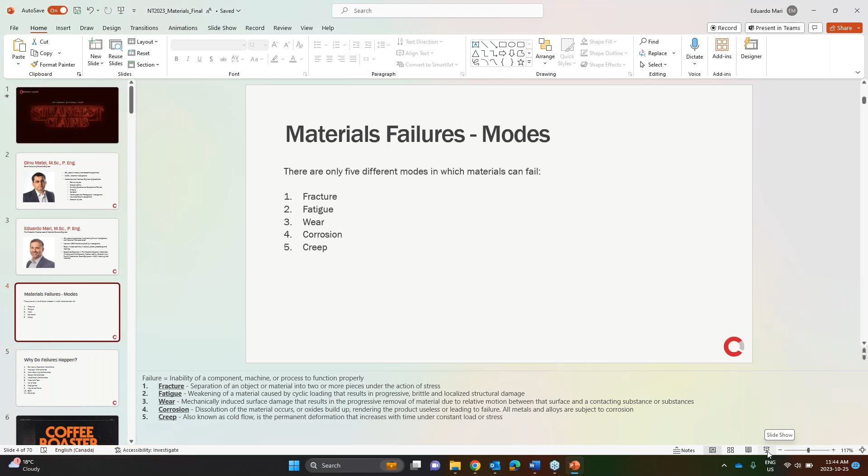Okay, thank you everyone for joining. I'm gonna show my screen here. Just give me a second. There we go. Can you see my screen, George and Mark? Yeah, looks good. Okay, fantastic. Again, thank you everyone for joining.

I'm going to be chatting with you today about some material failure cases, some very strange material failure cases. Just to begin, the failure modes in materials can be classified into 5 different ones: fracture, fatigue, wear, corrosion, and creep. Each one has particular characteristics and a way they present themselves to the trained eye or examination techniques.

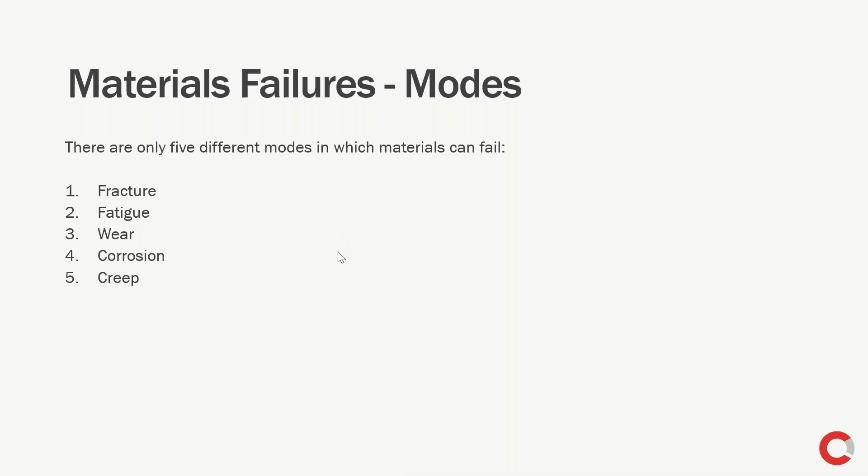Sorry Dino, do you want to start with your first case study? I think Eduardo covered this already. Yeah, I think he ran through these for you.

Among the interesting and unusual cases I've encountered, I want to share a few with you. The first involves a fire in a coffee roaster. A coffee roaster doesn't look very special from the outside, but it's important for coffee makers because this is where the coffee is roasted, dark or medium, depending on the temperature the beans are heated to. The green coffee beans are put into the machine and heated to a certain temperature to reach the desired properties.

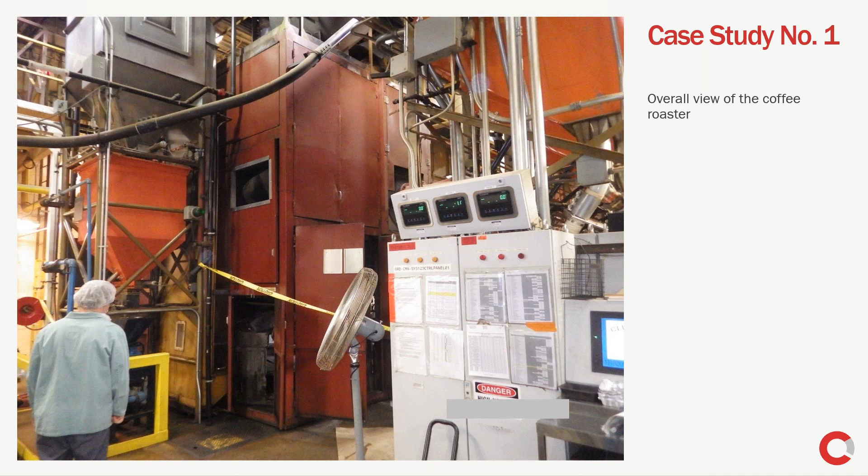This coffee roaster was about 20 or 30 years old, and they had encountered problems in the past with some of the rivets. Inside the roaster, it's like a tower, and at the base there are steel plates which are perforated to allow air through to adjust the temperature. These plates are secured to a frame using rivets, and over time the rivets deteriorated, causing the plates to lift, jam, and the motor shaft broke. The coffee self-ignited.

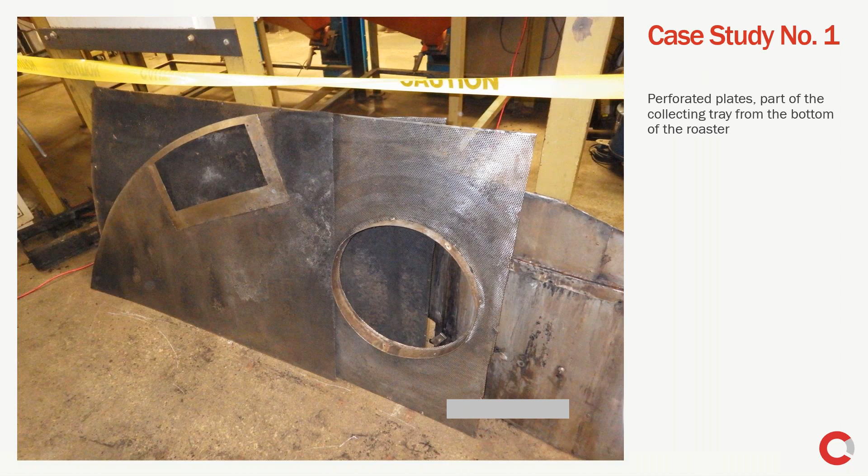I did not know until I was involved in this investigation that coffee is actually very hard. It was the coffee beans that degraded the rivets, allowing the steel plates to lift and jam. This is a section of the rotor for the roaster, and you can see it was heavily deformed. It shows heat discoloration and some post-fracture damage, showing that it continued to rotate after the fire started.

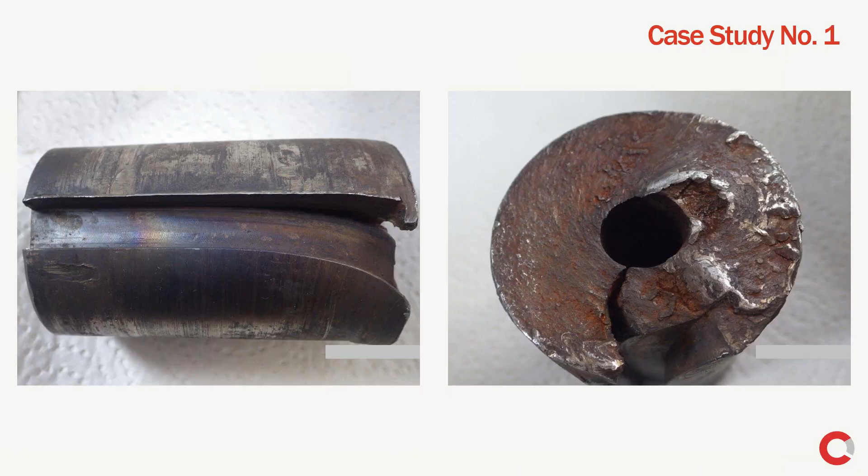The next case is also very interesting, and sad, because one person was left with a damaged hand. It involves a pulley machine from a gym. The pulley machine is designed with carriages that can go up and down along the columns, allowing you to adjust them to the desired position. Each column has holes where a safety pin can engage, keeping the carriage in place.

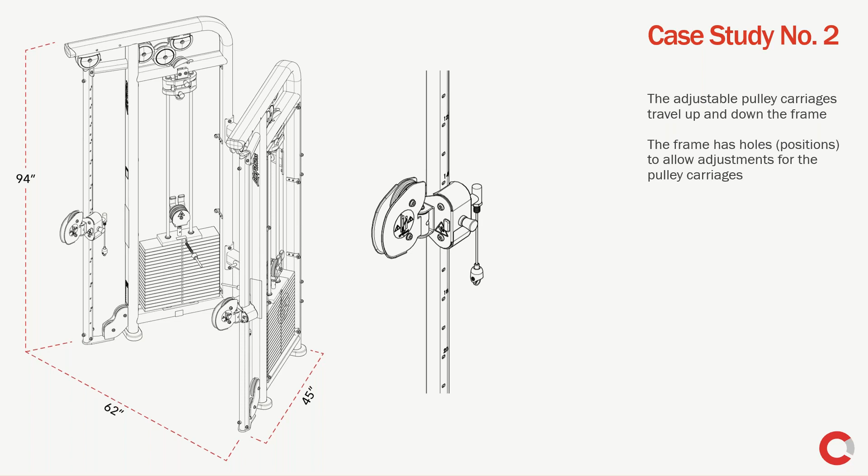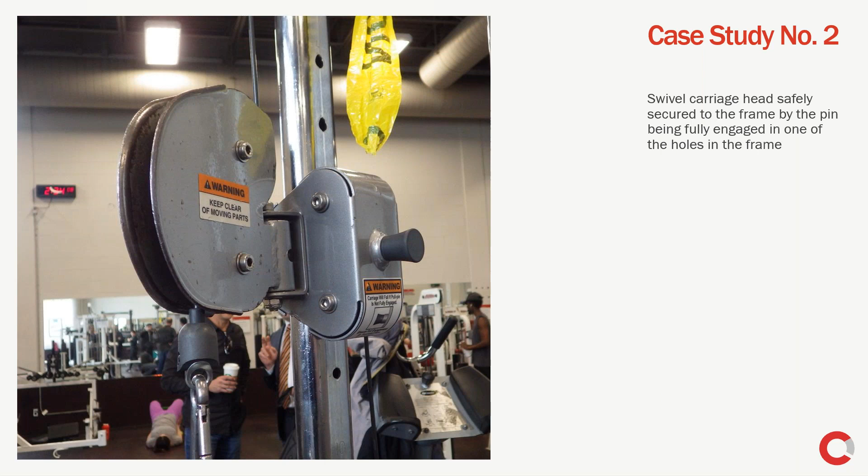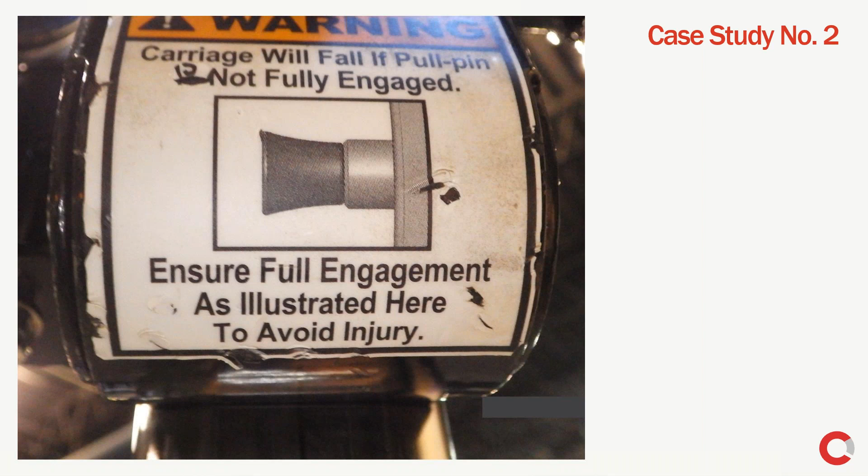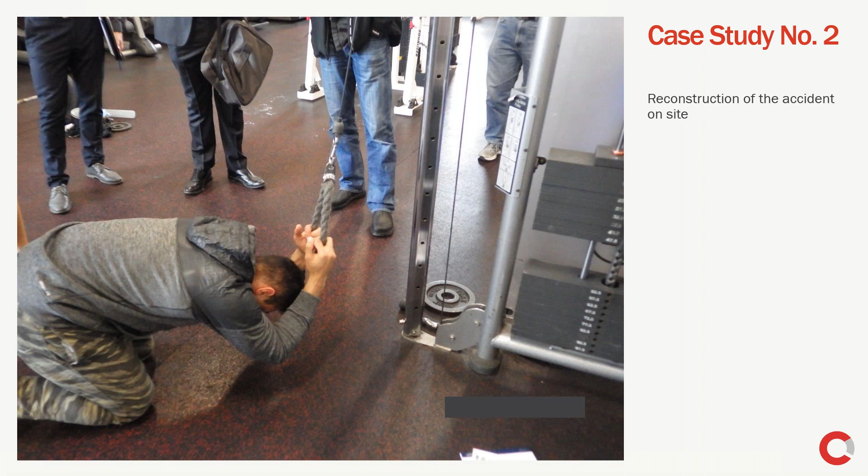As I mentioned, each column has holes where the safety pin engages, and each hole is numbered. For that machine, there were 22 holes, numbered 1 to 22. The user wanted position number 6, and you can see number 6 stamped on the column, but it's stamped a little deep. So without realizing it, the user set the pin into the round shape of the number 6 itself. It was only partially engaged, and when he started using the machine, the pin disengaged from position 6 and dropped to the floor onto his hand.

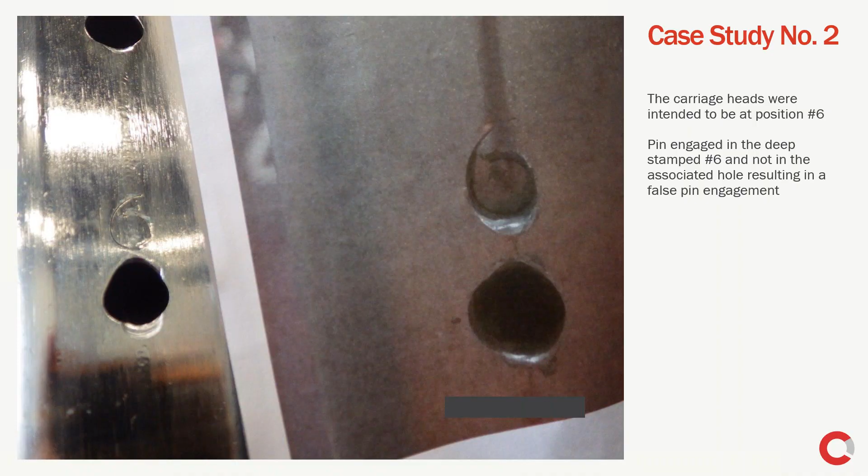A very interesting case we were involved in was associated with a chocolate manufacturer. This is high-end chocolate, successfully sold for years. However, one day customers started complaining that the chocolate had a weird taste. All the recipes, procedures, and machines were checked, but the problem persisted and the number of complaints grew. The manufacturer retained us and asked if we could help determine what caused the chocolate to turn bad.

It was an interesting file also because they sent us 30 boxes of chocolate to try. It was so good that at one point I had to ask my colleagues to stop eating it because I didn't have any samples left. We received a box of chocolate from an old batch and a box from a newer batch.

Interesting enough, and I learned it during this investigation, chocolate is the best absorbent of flavors. For example, if you have a piece of chocolate and you put it side by side to an onion in a fridge and leave them overnight, in the morning you will have onion flavored chocolate.

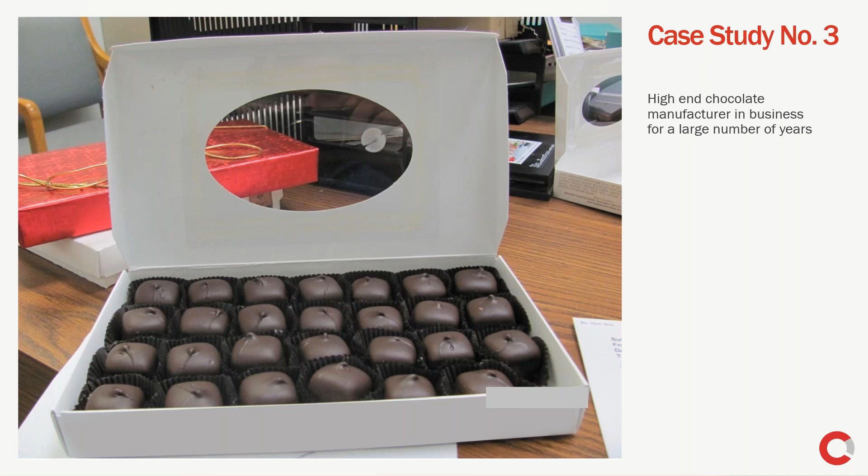Coming back to this investigation, we were told that the boxes were provided by a different manufacturer, provided as an open card box having on the lid a cellophane window. This cellophane was glued to the underside of the lid, and we examined an incident box and an exemplar box, and found traces of solvents in the glue. The manufacturer of the box had replaced the glue with one that was not food rated.

So all the solvents from the glue caused that chocolate contamination. Nobody got hurt, nobody ended up in the hospital. However, it was a loss of reputation and loss of revenue for the chocolate manufacturer. So based on our investigation, we reached out to the manufacturer of the box and they resolved the issue.

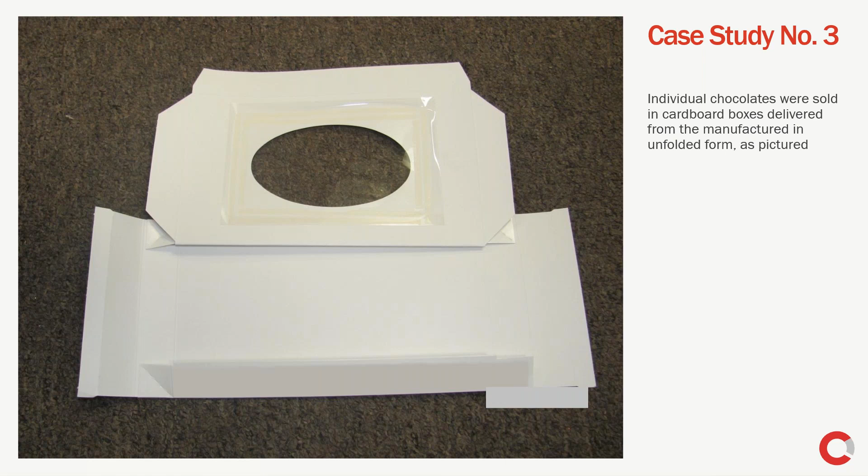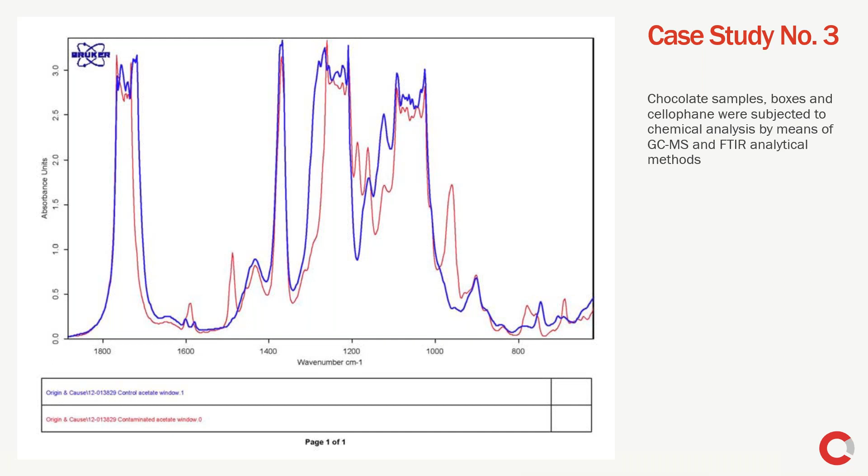Another interesting case we were involved in was associated with significant mold formation in the basement of a home. This was a home built in 1955, and everything inside was original - the piping, the furniture, only the appliances were new. The owners were an elderly couple who used to travel overseas every summer for about a month. During their absence, the house was monitored by their daughter, who checked for mail and break-ins, making sure everything was okay. However, she did not go into the basement because there was no need.

When the incident happened, it was July and extremely hot in Toronto. When they returned from their overseas trip, they were stunned to see the significant amount of mold that had formed in the basement. Restoration companies and plumbers were asked to attend, but nobody could determine where the water was coming from, because to have mold, you have to have water and humidity.

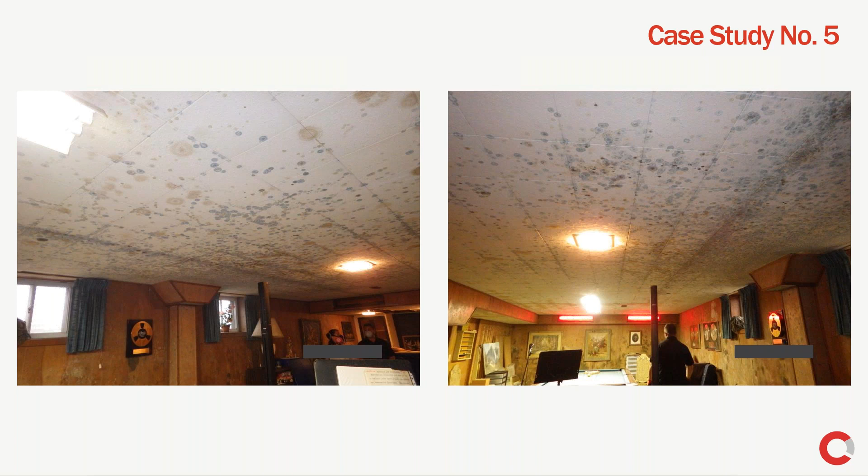Water that enters a house usually enters at about 4 degrees Celsius. During that particular month it was very hot, the AC unit was not on, and when the water entered the house at 4 degrees Celsius and reached the much higher ambient temperature, it started to condense.

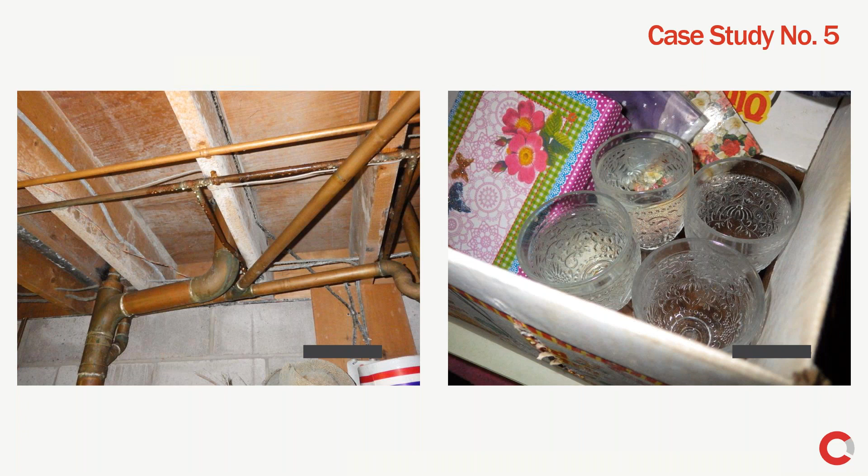Downstream from this bifurcation, nobody was using the faucets or appliances, so the water was stagnant and reached equilibrium temperature with the ambient. On the other branch, because of the ongoing call for water, it was continuously passing through, not having enough time to reach ambient temperature. The significant difference between the temperature of the water entering the house and the temperature in the basement caused the condensation. By replacing the toilet, this problem was solved.

Stray current corrosion is a phenomenon which is exactly what the word says - a current which travels in a path that it's not designed for.

The home was not occupied because the owner was in a retirement home, and somebody was checking the house once in a while, but they did not check the basement. So when the owner returned to retrieve some belongings and entered the basement, she was shocked to see the extent of this damage.

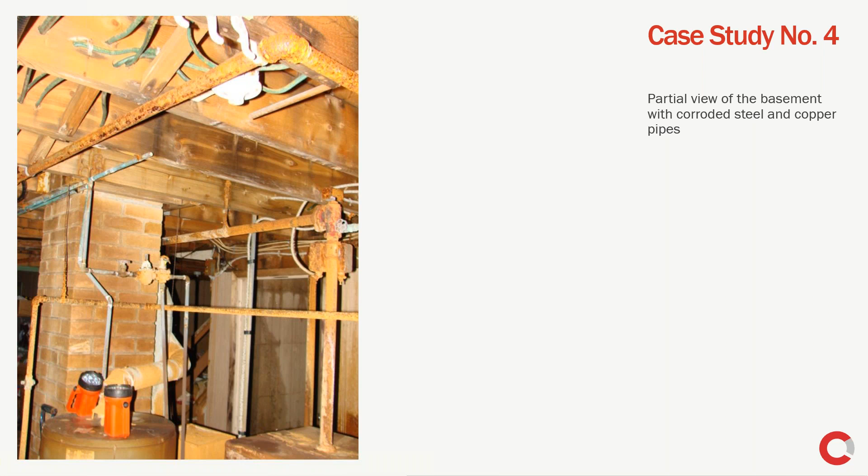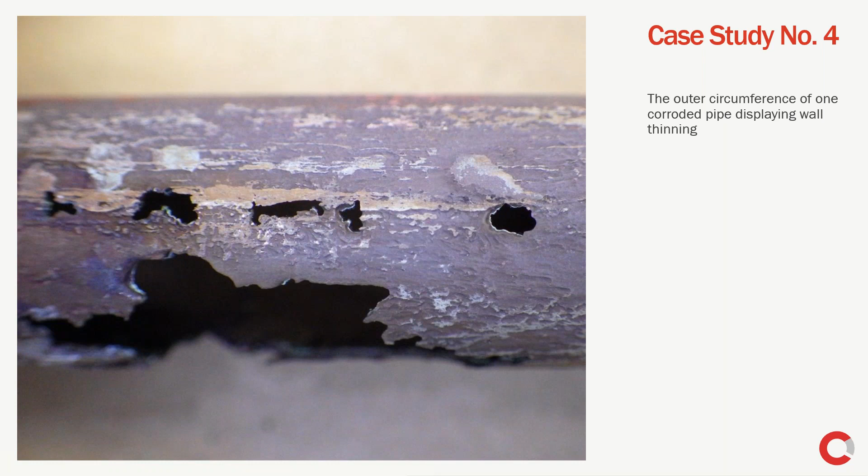This is a close-up view of one of the copper pipes which was corroded by stray current corrosion. Our investigation revealed that it was the plumber who grounded the system in the wrong way, allowing the current to travel through the metal pipes. We looked inside the copper pipes, and other than some patina, they were in very good condition on the inside, so the problem was definitely from the outside.

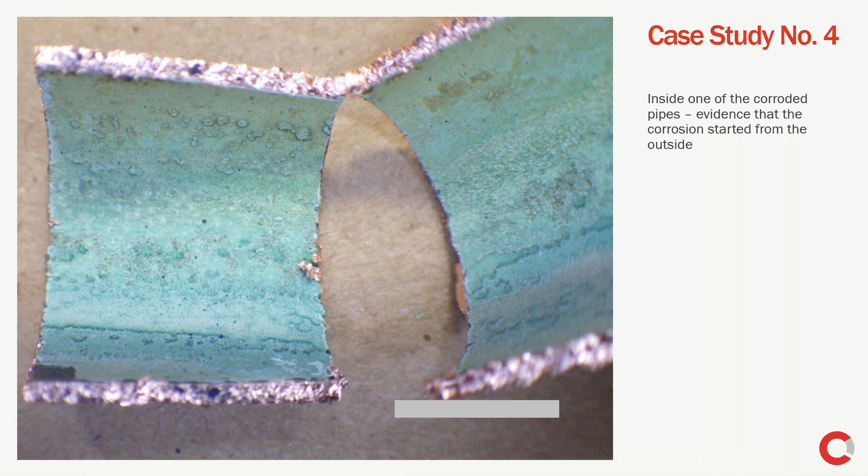Stray current corrosion can occur in underground pipes as well. If there is an electrical cable or a metal structure close by and the conditions are favorable, then the current flows from one source to another, leading to pipe corrosion.

In this particular instance, we are looking at an 8-inch diameter pipe associated with a warehouse. During one night, the pipe simply exploded, causing the concrete floor to disintegrate and causing further damage throughout the building. You can see that the force of the explosion was so high that it caused concrete to separate.

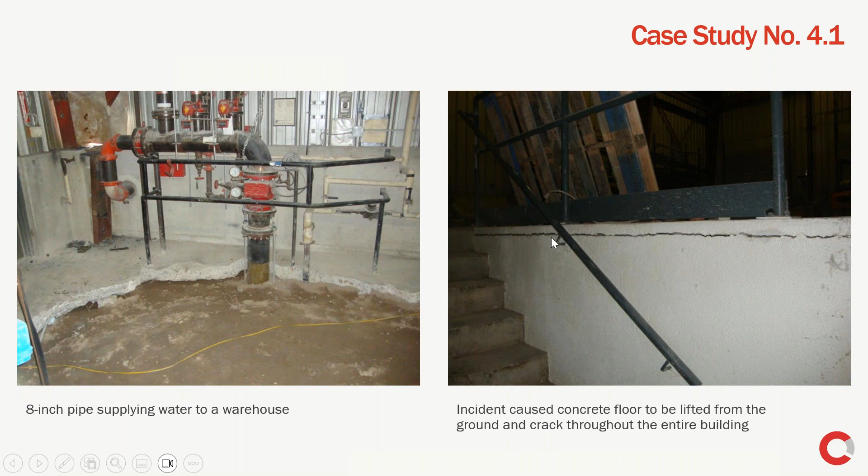What caused the corrosion in this particular case was the presence of an old railway track in close vicinity, so there was a flow of current between the railway track and this pipe.

What is typical for stray current corrosion is the fact that it's very localized and the pipe is not affected inside. You can see on the left image the typical appearance of an underground pipe affected by stray current corrosion, and on the right side image you'll see the interior of the same pipe, which is basically not affected.

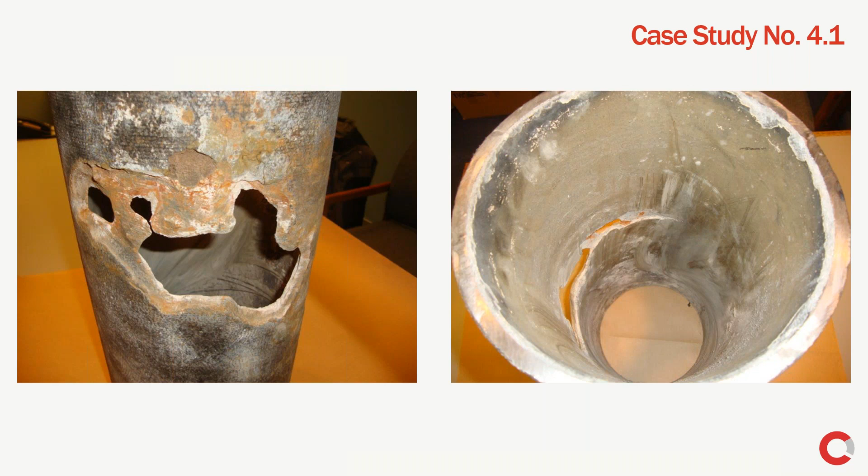This is another pipe that corroded due to stray current corrosion, and the features associated with this degradation mechanism are more visible here. The scoop-like features on the surface of the pipe are usually typical for stray current corrosion damage.

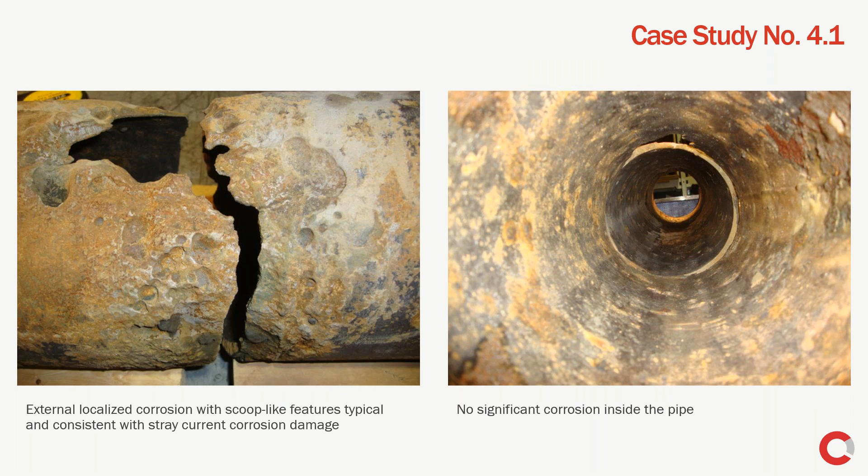And the last case that I wanted to present to you is the strangest of them all. These images were taken in a building which was used as a film studio. On the left side image, you can see that the stairs to the basement are not accessible because there is a significant amount of water.

Long story short, during winter time, the building experienced some freezing, which allowed water to discharge and fill up the basement. The problem with this building was that it was used as a film studio, and at that time they were shooting a movie about the Chernobyl nuclear reactor. You can see on the right side image, this is actually a reproduction of sections of the Chernobyl reactor.

All nice, very realistic - it looked really like an Eastern European plant. Our problem was that a lot of the pipes you see here were prop pipes, and they were designed to leak. So when we turned on the water, it was very difficult to determine which was the actual pipe that leaked and which were the prop pipes.

We finally managed to find the culprit, and we determined that freezing occurred because one side of the building was not heated. And with this, I will end my presentation here.

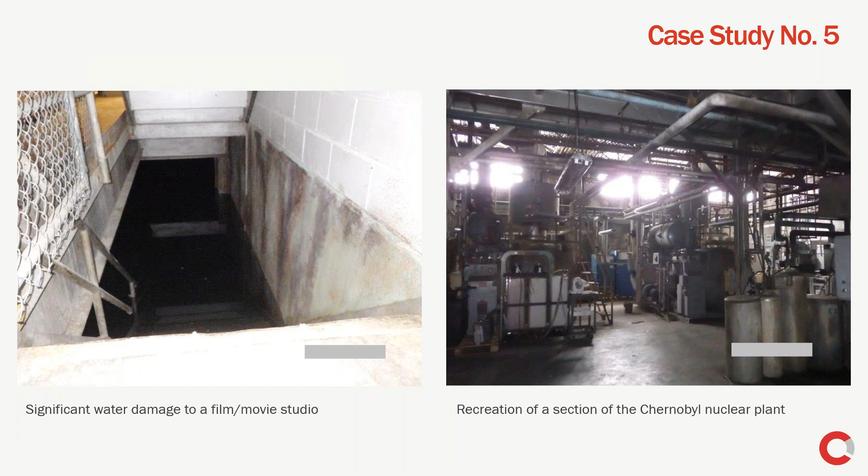Okay, everyone, thank you, Dino. Let me just find my slide here. There we go. Mark, can you see my slide properly? Yes, looks good. Okay, fantastic.

Again, thank you everyone for joining today. I'm going to be presenting three very interesting case studies here. First one, we label it Misfire.

It's a building protected with a fire protection system that is based on aerosols. Your typical fire protection system is water-based. You can also have chemical protection systems, gas-based protection systems, and foams.

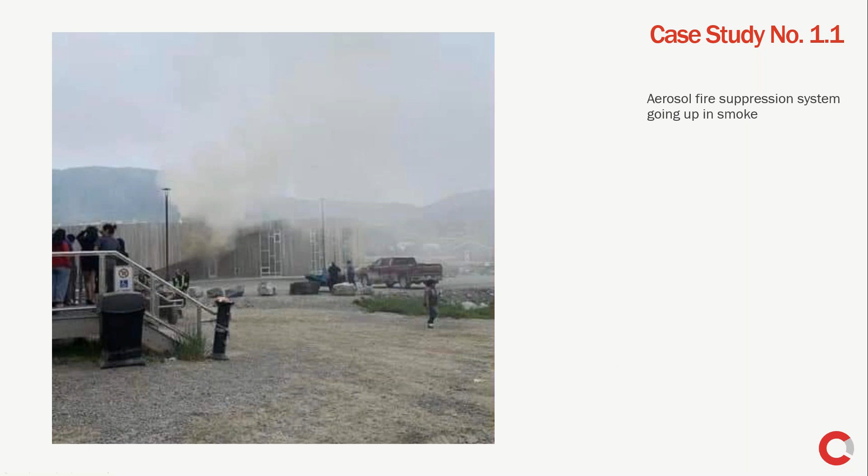Again, because this was a retrofit, these were installed throughout the building. There was no water-based fire protection system.

Sorry, someone's on the line with the unmute or mute option.

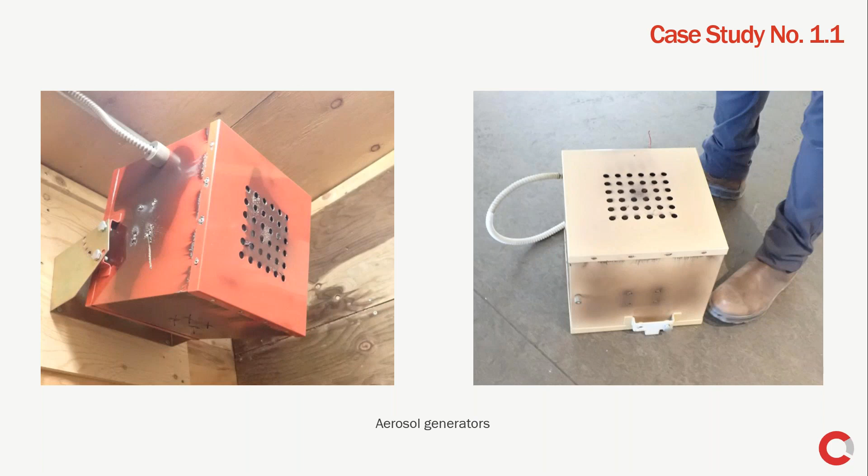On the left here is how it looks, some of the deposits from that aerosol. At the beginning, some of the first responders and investigators thought there was some sort of a fire somewhere in this area, but quickly they realized there was no such thing. It was just the deposits from the aerosol products.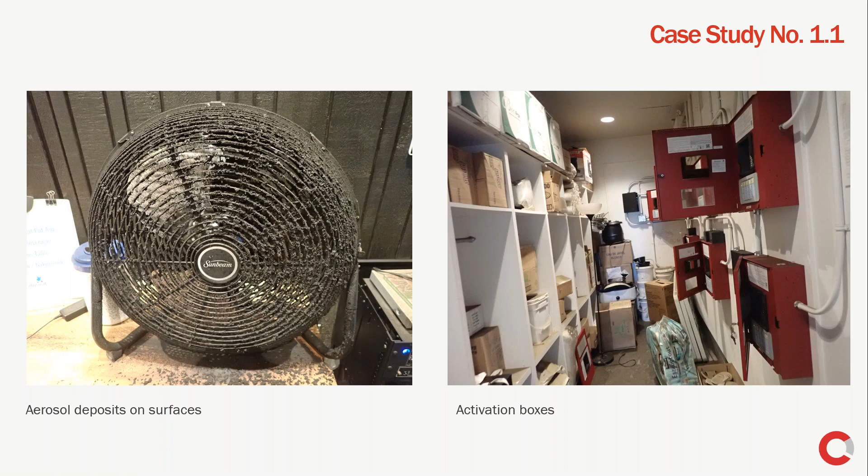On the right, one of the areas where the work to retrofit the protection system was installed. In this case, some of the activation boxes, just to show you a bit of the system. In this particular area, there was no aerosol generator, so it was relatively clean compared to the rest of the building.

One thing to note in that particular case is, and again this image is just a general representation of a building with different zones for the alarms and fire protection system. In a typical building, you would have an alarm system that goes throughout the building, throughout the different zones.

But particular zones of the building are piped independently. So there's going to be a valve and a piping system to zone 1, zone 2, 3, 4, and so forth.

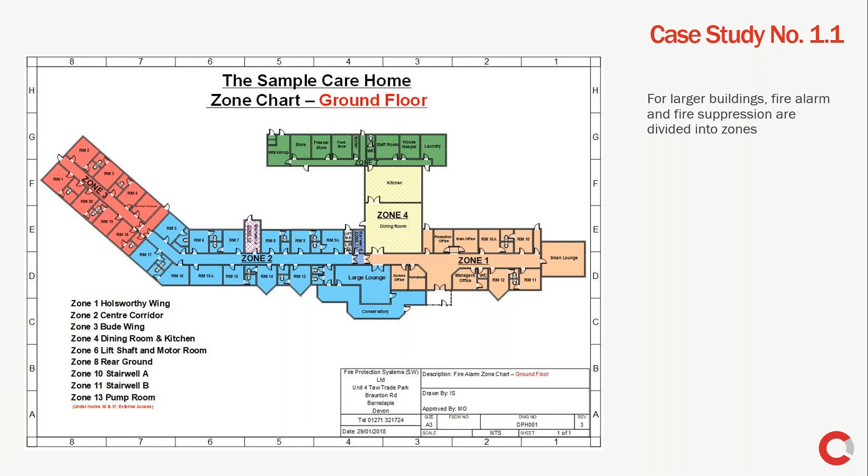And there are a number of reasons. One in particular is when you have additions. Another one is when you have different systems or requirements. Say that you have a dry system requirement in the parking garage, or you have storage in a particular area that requires larger piping. So then you have different zones to accommodate for that.

In the case in question, one of the situations that we had to account for was the activation of all zones at the same time.

And the sequence of events, or the sequence in which the activation occurs in a system like this: you have the detectors, or the smoke detectors, heat detectors, or manual pull stations, and then all those signals go into the main alarm panel. There will be a visual and audible alarm that indicates to the occupants that something is happening.

Then in a system like this, there is the opportunity to abort the activation. So there's an activation delay, there's an abort switch, and then finally, after that time has elapsed, the signal goes to the activation panels and the aerosol generators go on.

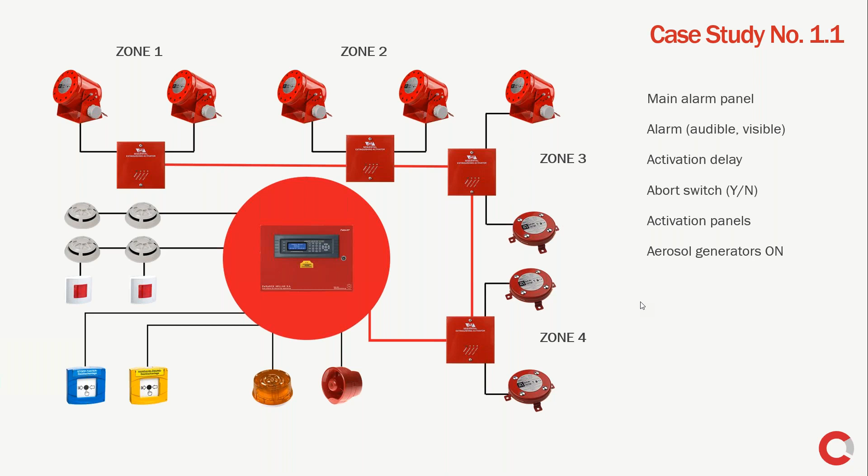And again, this was not supposed to activate in all zones at the same time. However, part of the investigation is to understand why that happened, and to try to determine who was responsible for that particular issue, either with the installation, with the logics in the panels, or with the work that could have been done or being completed at the time.

Again, one of the strange claims. A second case study I have for fires: I want to bring up some commercial kitchen fires and fire suppression systems.

In commercial kitchens, the main fire suppression system, or the required fire suppression system, is wet chemical agents.

And they can activate two ways: one, by a manual pull station, and two, by some fusible links that automatically activate the system in case of a fire. In this image, I'm showing one of the releasing modules on the left, which is tasked with

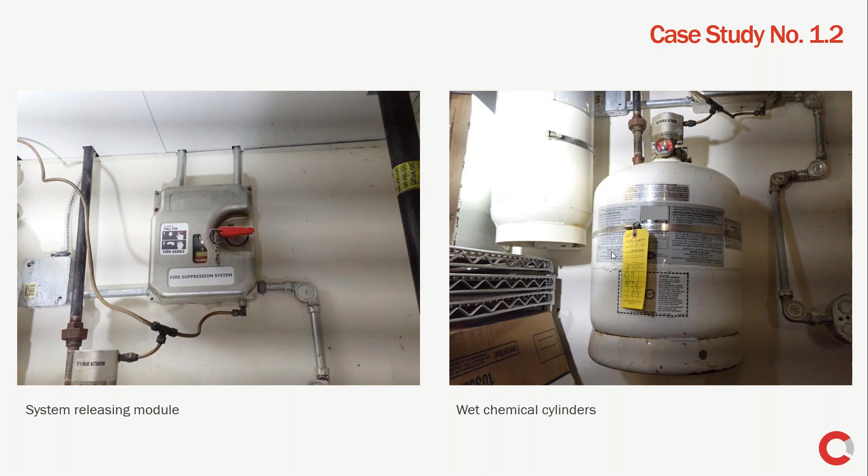activating or opening up the wet chemical cylinders shown on the right. Once those pressurized cylinders are open, that chemical flows through the nozzles directly onto the appliances, and obviously any fire that may be present there. It also goes into the hood and the exhaust duct, and normally is able to extinguish or control the fire until the fire department arrives.

How does that release module look like inside? Basically, if you see on the figures on the left and right, there's two wires coming in, some levers, and a canister of pressurized nitrogen. One wire goes to the manual pull station so you can activate the system manually, and the other wire goes to the fusible link, so whenever the system activates because of a fire, it just goes automatically.

Then what happens is we have a compressed gas cylinder that is triggered or fired by a triggering pin, and that pressure will push open the valve in the wet chemical agent cylinder. Similar story on the one on the left versus the right. The main difference is the one on the left connects to the cylinders via some piping and fittings, while the one on the right connects to the tank directly, right through just one gasket area on top of the tank.

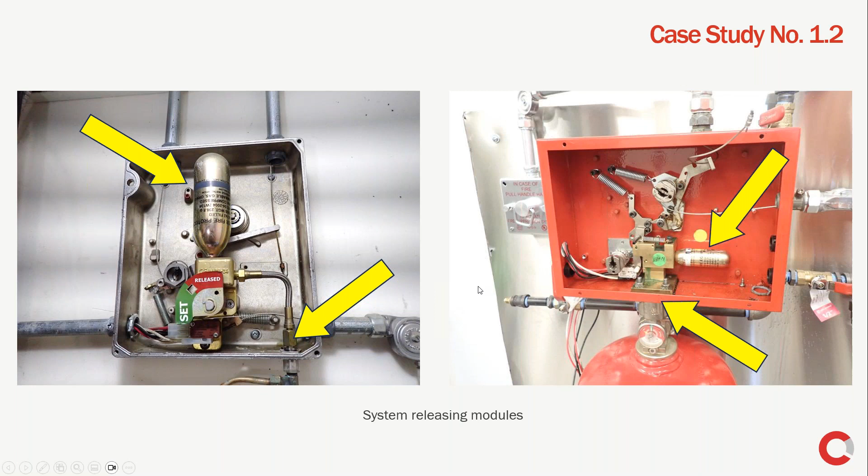So again, this is a schematic of how the system should work. Upon the detection of fire or automatic activation, the chemical agent goes directly onto the appliances and the fire and suppresses it. The compressed gas canister here on the right is tasked with opening those wet chemical agent cylinders.

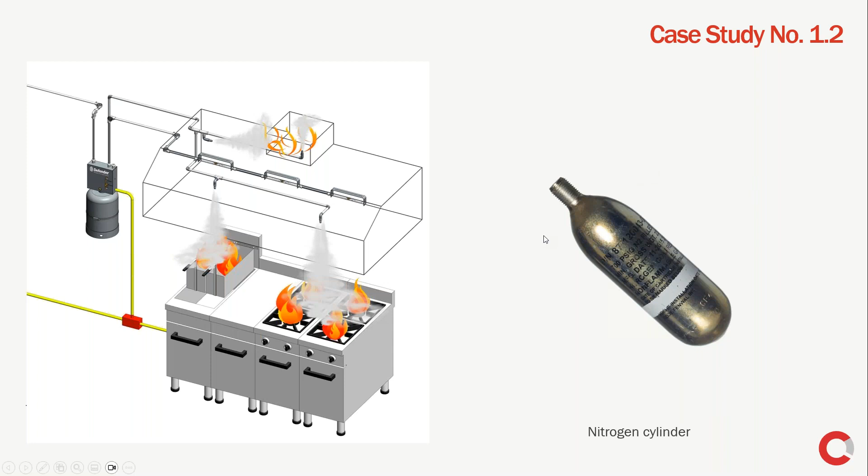Interesting enough, the standard requires inspection of those cartridges, and the standard very generally refers back to the manufacturer instructions. When you get to the manufacturer instructions, basically every 6 months there should be an inspection, a test of those cartridges. Surprisingly, they're very small, and you can weigh the cartridge, and by understanding the weight difference to an empty cartridge, you can tell if they're full or not. In such a small volume, you can pack quite a few grams of compressed nitrogen there.

In any case, in one of the two cases, we came up with the conclusion, or the opinion, that the piping or the tubing, the fittings, were not properly tightened and leaked. In the other one, we worked with the theory of the seal of the cartridge leaking over time.

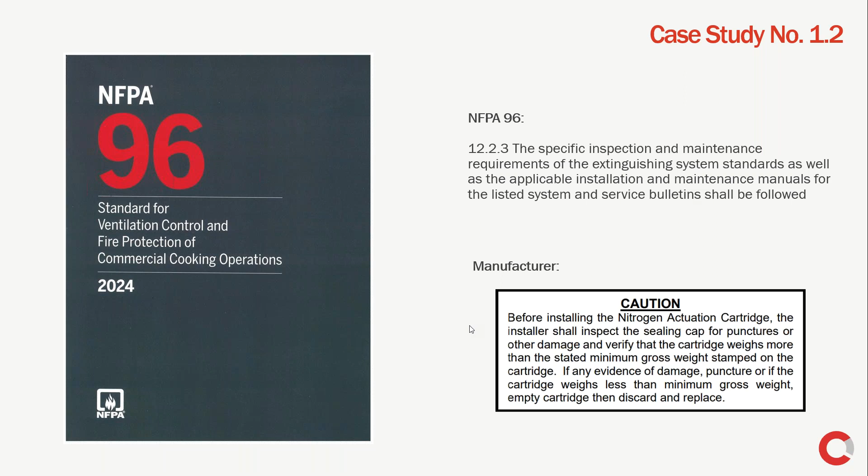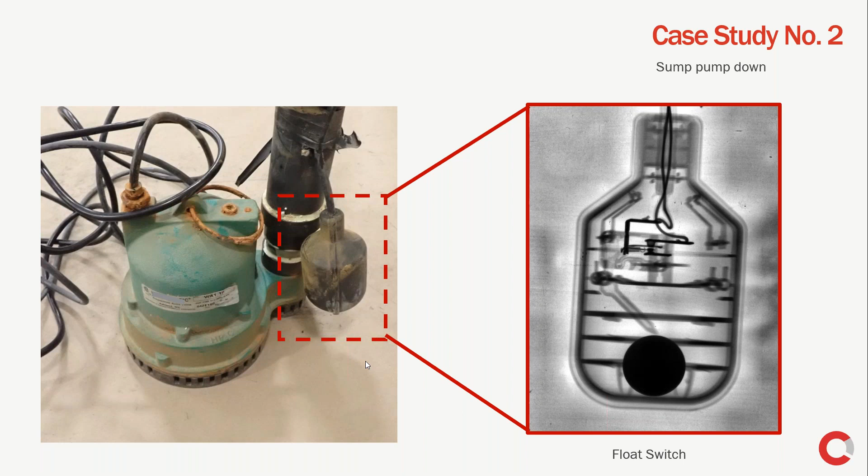I have an X-ray picture on the right showing some of the internal components, and there's a number of things that can fail with this. You have the micro switches that can fail because of electrical shorts, or because of water intrusion and corrosion. This float switch itself can fail because it doesn't have enough space to move up and down, or the strap is too long or too short. Again, a number of situations that can happen here.

Another interesting one comes to the start capacitor, which is an electrical component inside the unit that allows it to start rotating. If they're not properly manufactured or installed, they can fail prematurely. Remember, all of this mechanical equipment will fail eventually based on wear and tear, but it's the premature failures that we're looking after in most of these cases, after a year, 2, 3 years.

One other interesting case involves the impeller or drive shaft that seizes, and that can be because of a number of things, including lack of operation or improper manufacturing, jamming because of foreign material.

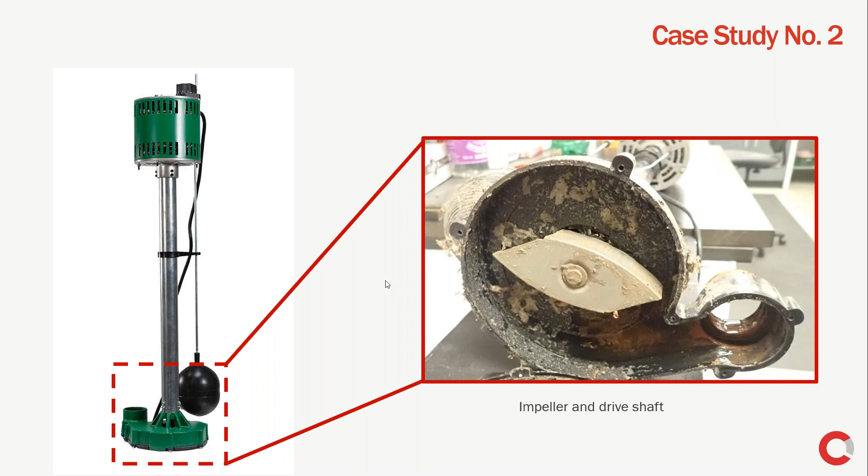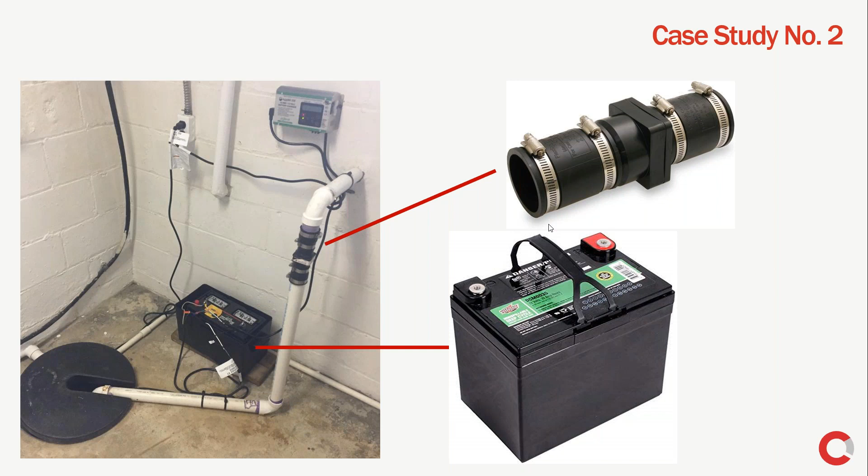Next, I can tell you about the backup systems and the check valves. Most of these sump pump systems should have a backup system because, as I said before, they're bound to fail eventually. So you need a backup system to activate once the primary fails. The check valves, as I'm showing here, can also fail, causing the system to operate continuously or more frequently than normal, leading to premature failure.

Okay, so that was a bit of an understanding of how sump pumps work and fail. This is the case I want to refer to. Interesting enough, it's a relatively new property, a new house.

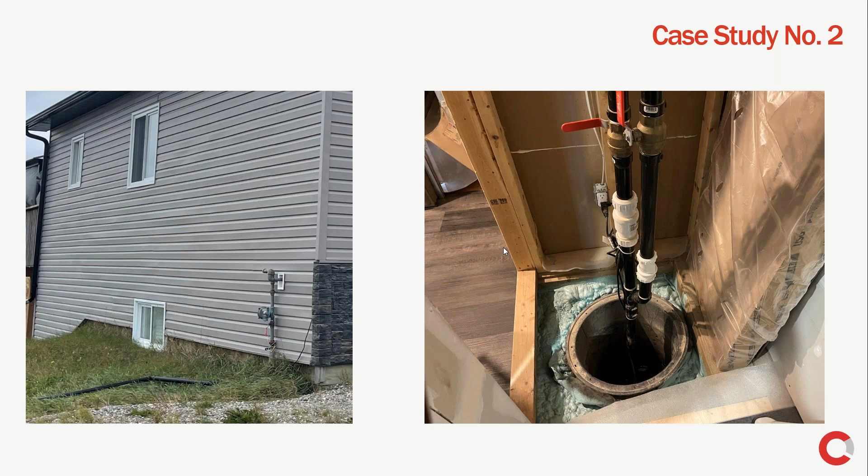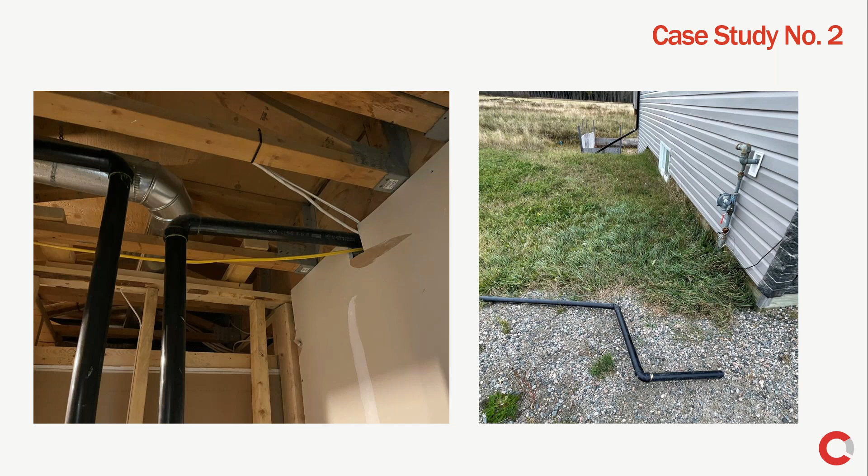The installation of the sump pump and the drainage system was done such that the piping coming out of the house was buried underground. You can see the installation on the left in the sump pump room. Outside, there is an interesting configuration of that discharge pipe.

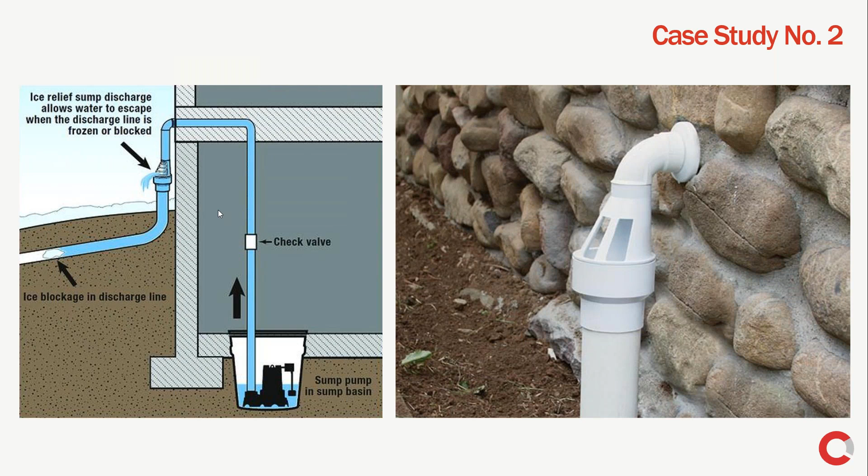Basically, this is what it should have looked like. There is the pipe coming out of the sump pump, it goes through the wall, and then discharges to the outside, either directly or through a discharge pipe or drain pipe that has to have an open air gap, just to prevent any back siphoning, as well as in case of blockages, so the water has somewhere to go.

All of this situation creates spaces for water to be trapped and freeze over the winter time. And then once there's a blockage, there's nowhere for the water to go, just back into the basement.

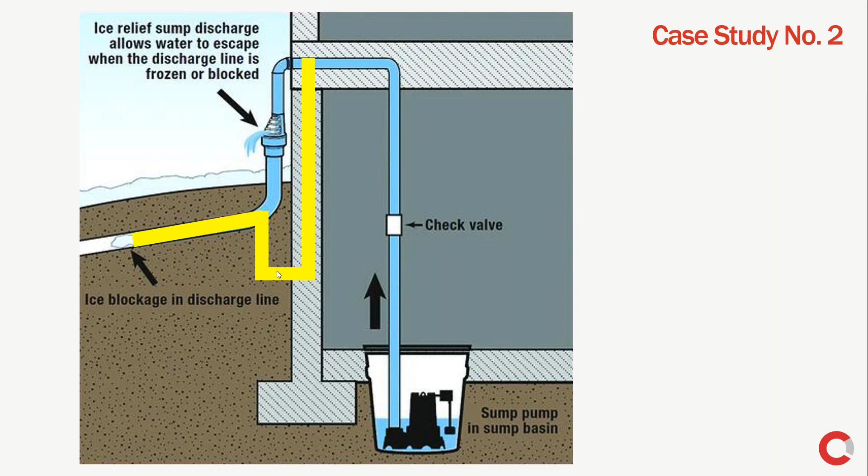My third case today is one of my favorites. It's labeled Cold Steel, and you're going to see why very quickly. So the Titanic - who doesn't know the Titanic? It was thought to be unsinkable because it was made of steel and so large that nothing could bring it down. I'm going to show you a couple things about the Titanic and another case that resonates.

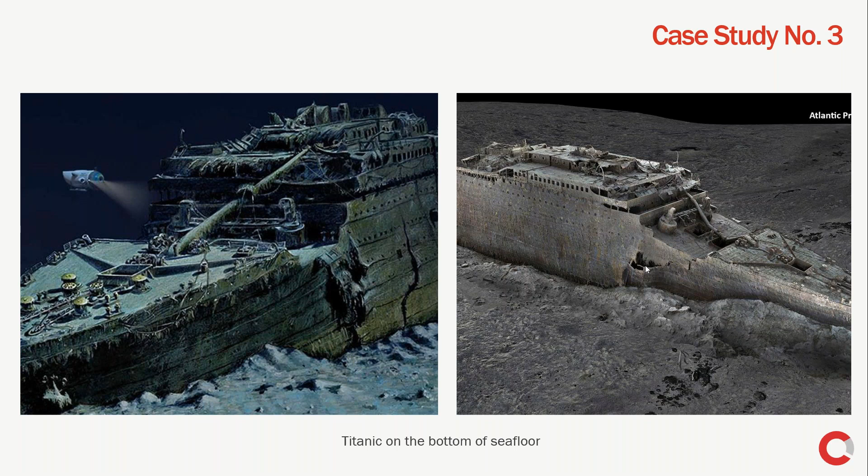So the Titanic, how it looks, or a representation of how it looks at the bottom of the ocean - the experts investigating found significant cracks throughout the hull, in different locations. One of the things they compared it to was some of the Liberty ships that cracked.

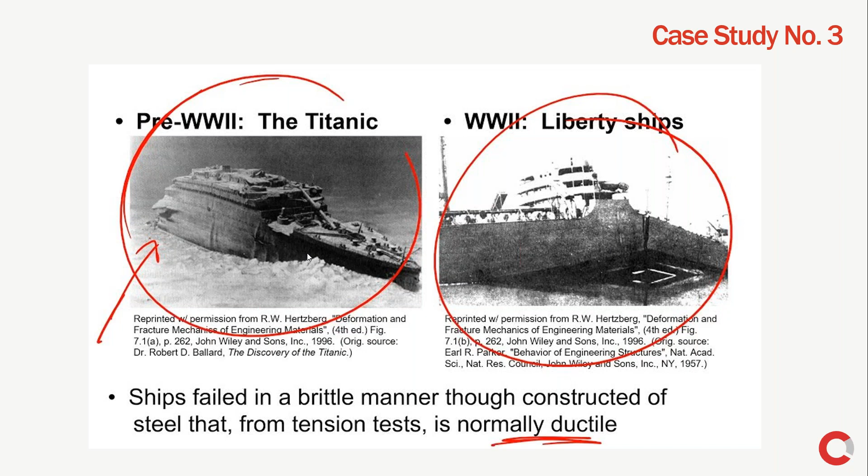The Titanic is 1912. Liberty ships are post-war, or pre-war, around the 1940s, 50s. We have very similar failure modes here. The very simple, very elemental test that is done on most steels to understand how they behave - their ductile or brittle behavior, and how they behave under temperature - is something that probably wasn't properly done, or done at all, in both of these cases.

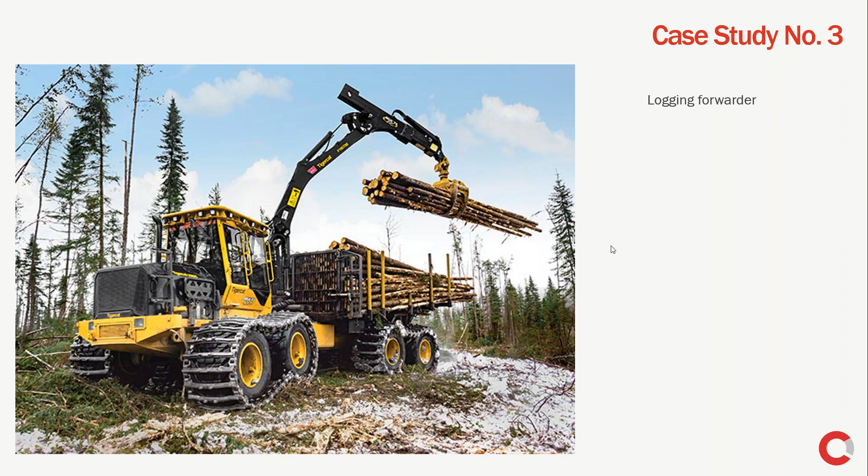The specific case I want to talk to you about is a log forwarder, which was operating in the Canadian North during the winter time, and it failed catastrophically, following the buggy breaking off the back from the tractor on the front. There's a chassis that connects the two, and that chassis broke off, and the equipment just toppled over, causing significant damage to the equipment and personnel.

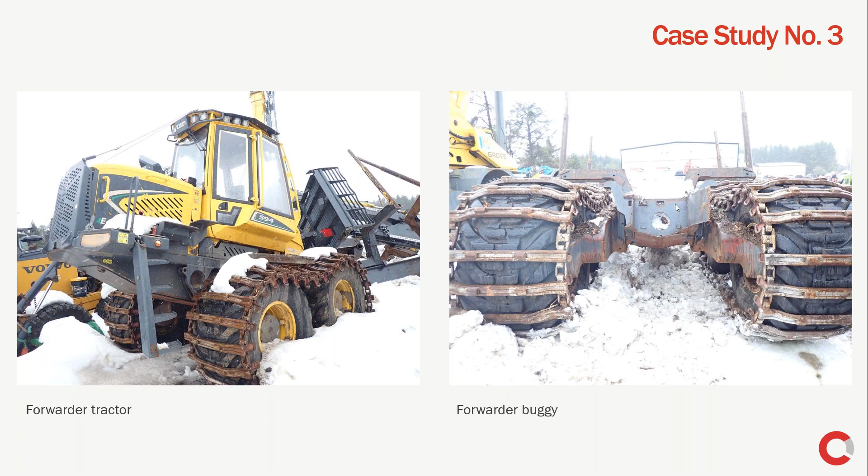This is how some of it looks. You can see on the left the tractor, on the right the buggy, and then that chassis that connects them. You can see part of the chassis here that connects the buggy to the tractor - surprisingly, a jagged fracture. You can see the fracture on the chassis here.

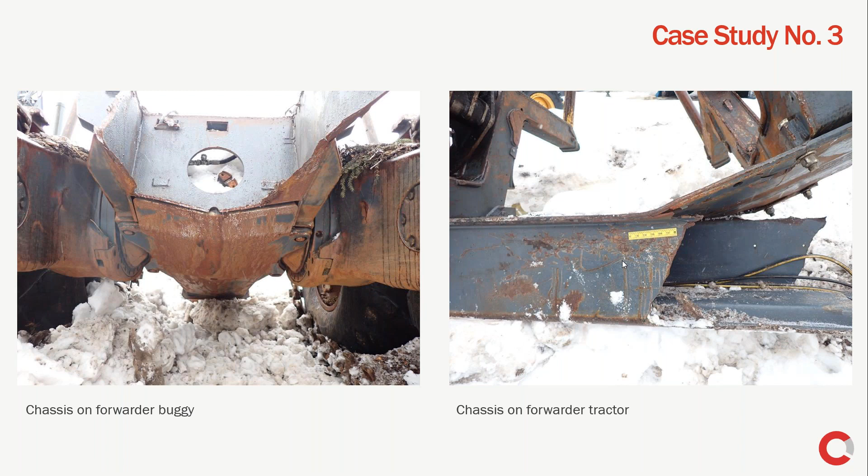The temperature at the time of the loss was around -30 Celsius, and that's going to come into consideration later during the investigation. But the first thing that comes to mind when looking at this fracture is how brittle it looks, how far the cracks propagate from the point of origin, and how jagged they are. It's hard to find failures like this today, because normally failures would look ductile and not brittle like this.

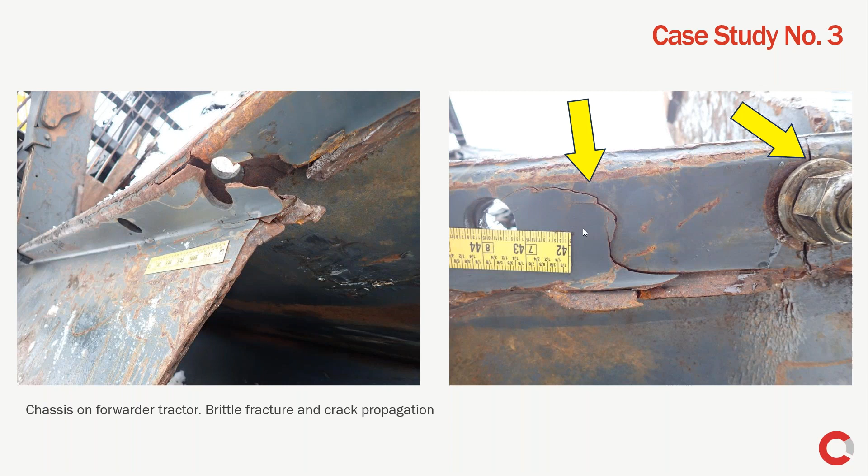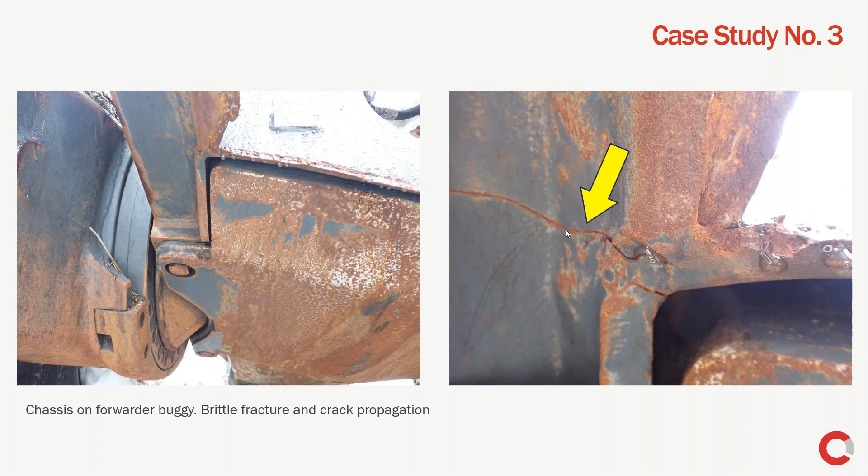This is at the back of the buggy where the chassis connects to the buggy. You can see even though there's no fracture in this area per se, no separation of the chassis, it looks like the forces were such that cracks propagated from the corners, which obviously act as stress concentrators. This is the other side. We also have a similar pattern of cracks propagating from the corners here.

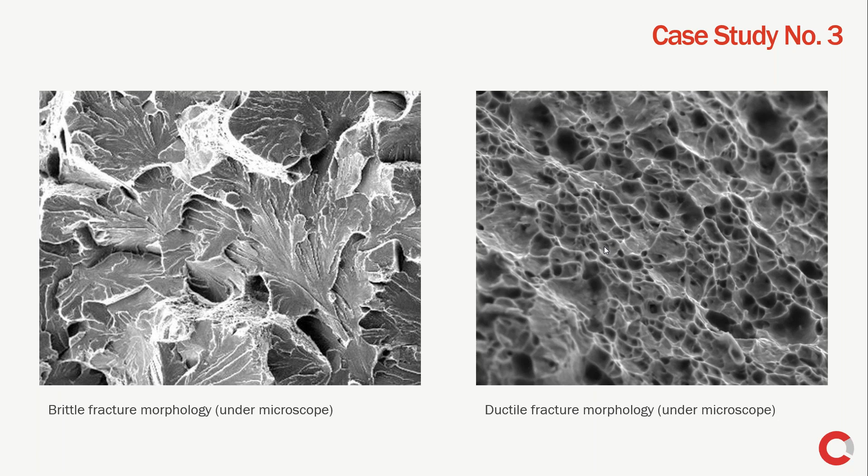Then we get that fracture, that failure that is, first of all, instantaneous. It propagates much farther than it should. The cracks just grow very large, and it's just like a piece of glass when it fractures, very brittle, as opposed to say a paperclip that we can bend many times before it fractures. If we do the same with a piece of thin glass, it's just going to shatter right away.

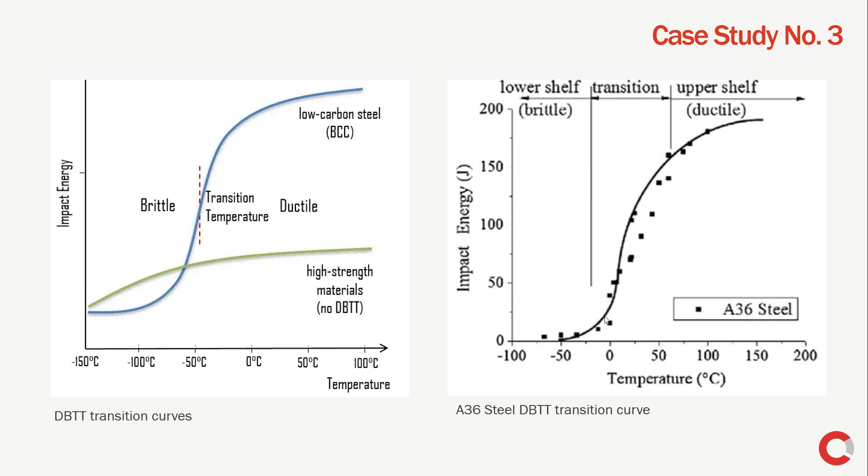In a case like here on the right, which is the A36 steel, a very common steel used for construction of tanks and other equipment, we have a transition temperature that is roughly around 10 Celsius or so. What that says is we can't use steels like these on equipment that is subject to flexural loads or extreme flexural loads or impact or other applications where the material should have a transition temperature much lower. In this case, that's pretty much what could have happened. The transition temperature of the steel used was not sufficiently low to remain ductile during operations in the Canadian winter, and it failed catastrophically in a brittle manner.

For now, that's about it for me. If you have any questions, I'll be happy to take them, and I'm sure Dino as well.